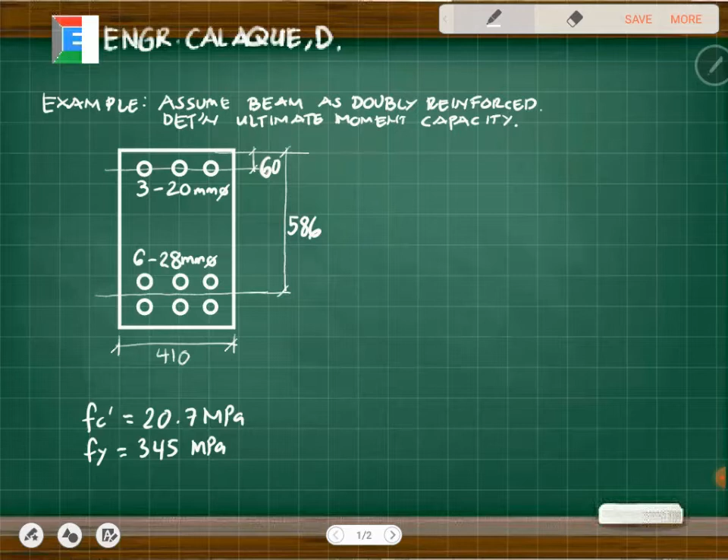Okay guys, let's continue on doubly reinforced beams. This time we'll investigate and determine the ultimate moment capacity, assuming that the beam in the figure is doubly reinforced. So the problem tells us to assume that the beam is doubly reinforced.

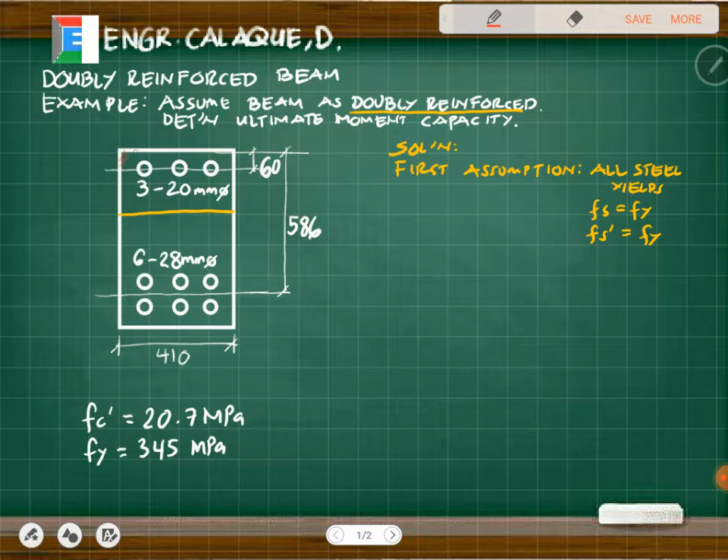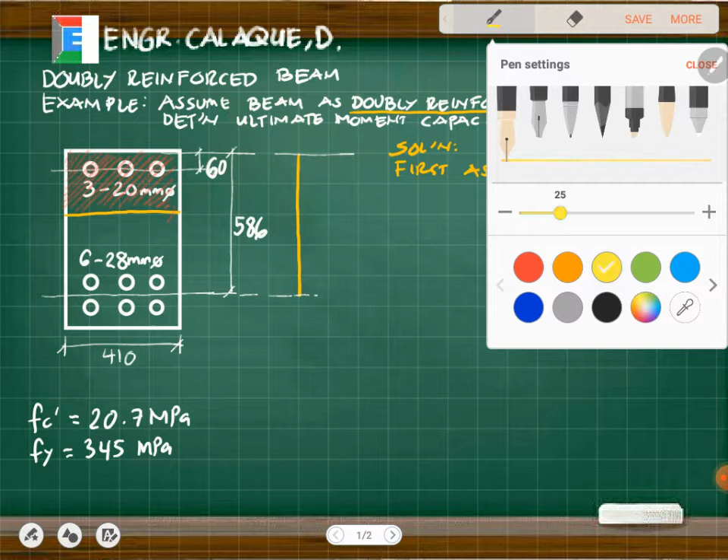Let me draw the forces. Considering the compression side, we have two forces here: the compressive force due to compression steel, CS, and I assume this is the center of gravity of the compression block, so let me project that - this is CC.

And then we have the tensile force for the tension bars. So by summation of forces along the x-axis equals zero, the tensile force is just equal to CC plus CS. And we know the tensile force here is As total times Fs. Then our CC, that's at the compression block.

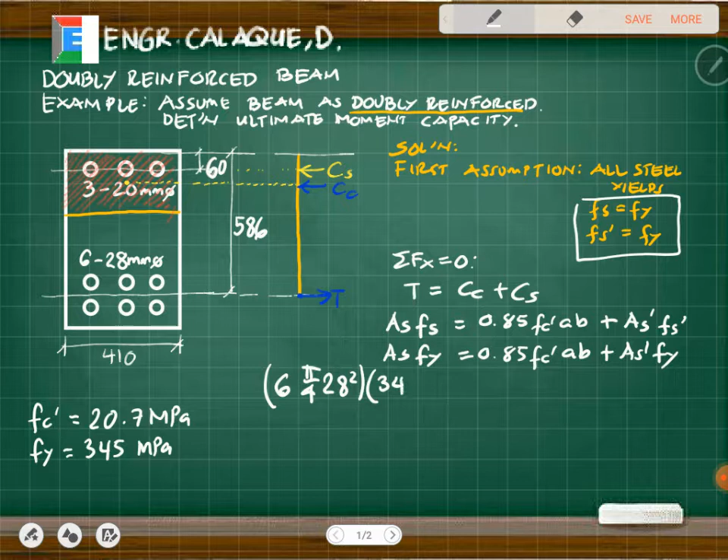So here we have 6 bars at pi over 4 times 28 squared - that's our As. Then our Fy is 345. And we have 0.85 times fc' which is 20.7 - we want to find A, the value of A. Our B is 410, plus the As prime, which is 3 bars at pi over 4 times 20 squared, times Fy which is 345.

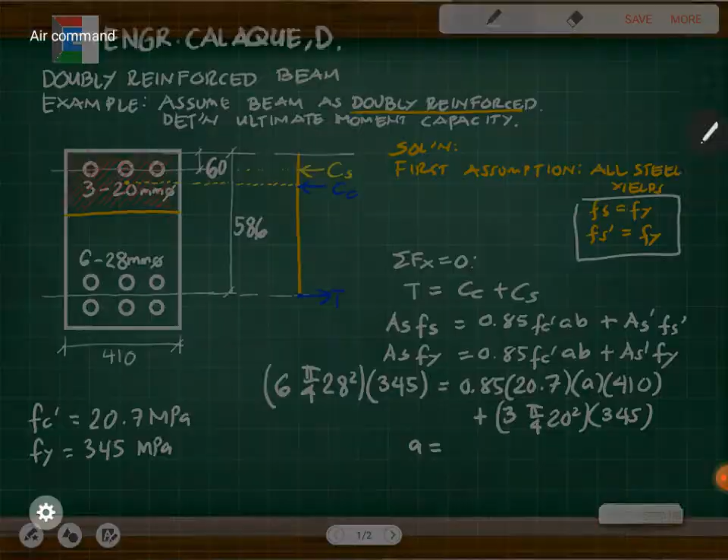345. So therefore, masolve natin yung value ng A. And that is just equal to... meron tayong 6 na shift, pi over 4 times 28 squared.

Times natin ng Fy na 345. Okay? And then alpha equal ng 0.85, diba? Yung Fc prime natin is 20.7. And then yung tinatanong yan yung A.

Okay, and then I have 410 na beam width, no? Yung ito, ito yan no? Then plus tayo nung area ng compression bar, which is 3 tag shift, pi over 4 na 20 squared. Yan yung diameter ng compression bar.

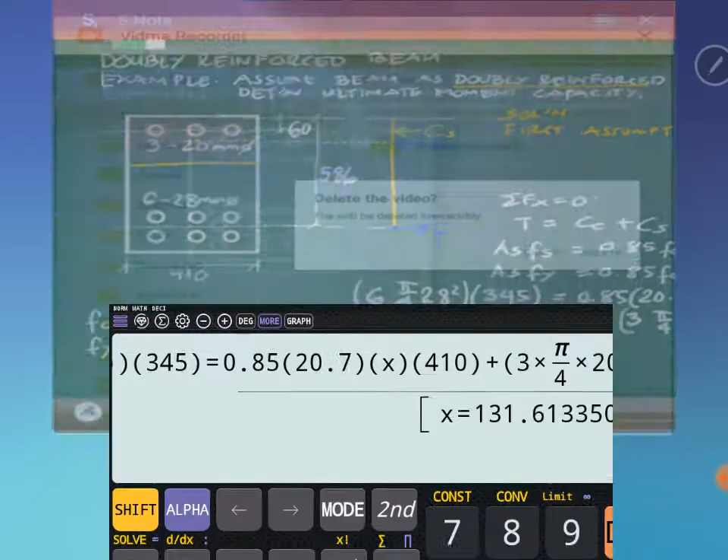Okay, and then we times yung Fy na 345. Okay, times 345. So shift solve. So yung A natin is just 131.6. Okay, so we have A that is 131.6.

So therefore, masolve na natin yung value ng C. We have a = βc. Yeah? Yung beta natin, since this is less than 28 megapascal for 2010 or 2015, so yung beta natin is just equal to 0.85. Okay ba? So yan yung ilagay natin dito. So we have 131.6, 0.85 C.

Therefore we have the value of C, and that is just equal to... 131.6 alpha equal nung 0.85 alpha x. So we have 154.8.

Okay? So ngayon, since nakuha na natin yung value, di ba? Ayusin ko lang muna, ha? Okay, so kailangan nating i-verify ngayon yung assumption natin. Verify assumption.

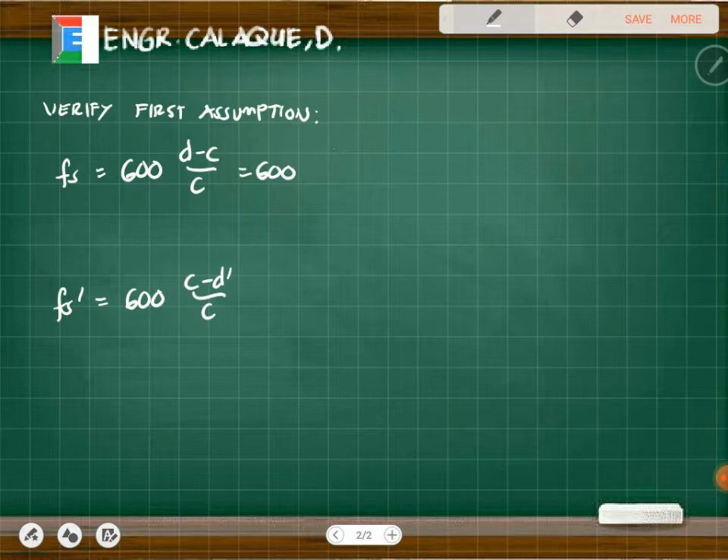So check natin yung Fs na 600 ng d minus c all over c. At then check natin yung Fs prime na 600 c minus d prime all over c. So substitute natin yung value. Therefore we have 600, yung effective depth natin is ito yan ha, 586. So we have 586 minus yung C natin na compute, 154.8, all over yung C natin na 154.8.

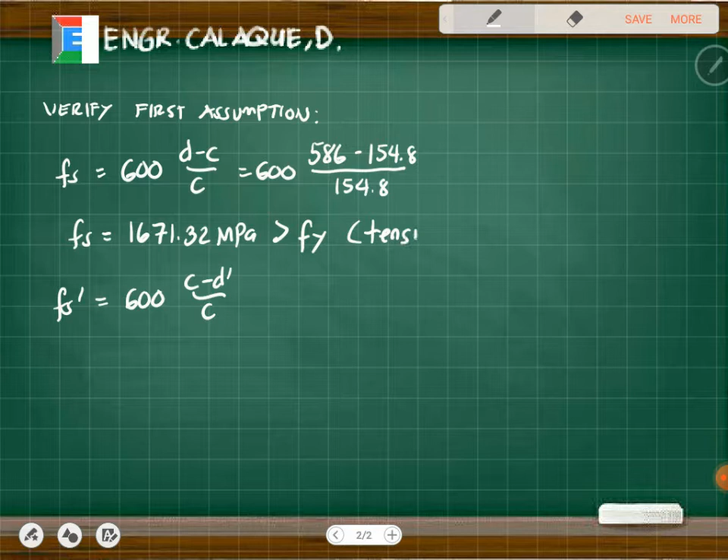So thus we have the value of the Fs, and that is just equal to computing ko muna. So I have 600 times 586 minus 1, minus 154.8 all over 154.8, and then equals, no? So we have 1671.32 megapascal. So since this is greater than Fy, so assumption is correct, tension still yields. So assumption is okay, no?

So okay na yan, no? So okay na yung computation natin. So next is yung Fs prime for compression bar. So we have 600, yung C natin is 154.8 minus yung D prime natin, which is ito yan. Ito yung D prime natin, yung 60 na yan. So minus 60.

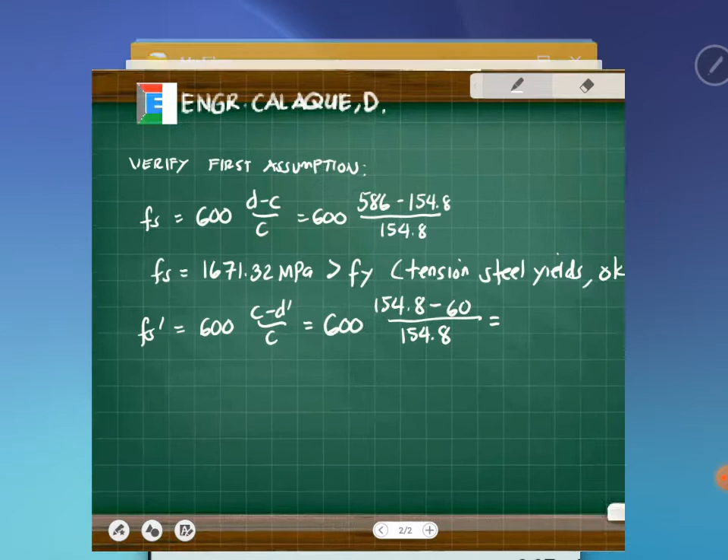All over 154.8. Okay, so therefore we have the value of, kapitin ko muna, I have 600 times 154.8 minus 60 all over 154.8. So therefore we have the value of 367.4 megapascal. Okay, yung Fy natin is 345 na.

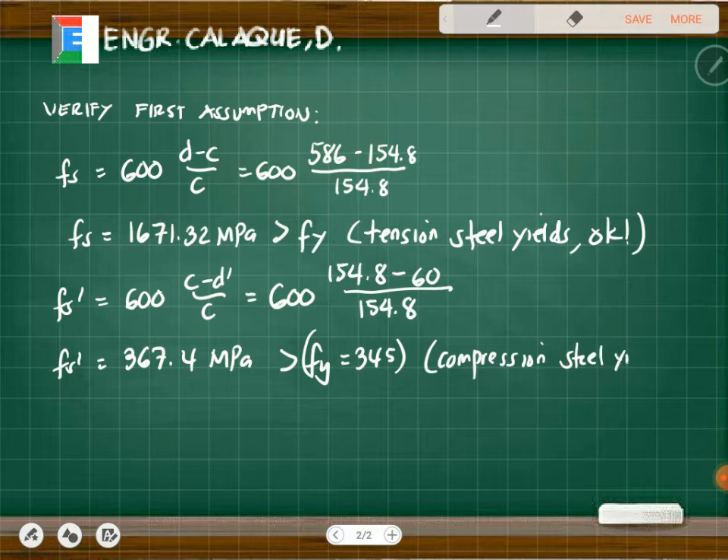So mas malaki pa rin to. So this is greater than Fy na 345. So therefore compression still yields. So yung assumption natin is okay. So ito na, ano? Ito na yung gagamitin natin.

Okay, so makompute na natin yung moment. Okay, so considering na lang ako dito, kunin ko na lang yung moment nito. So kailangan makuha ko lang yung mga moment arm nila, no? So yung moment arm nila ngayon is ito yan, di ba? Yung distance na to patungo dito, ilan yan?

Considering CC. So ito yung depth ng compression block natin is A, di ba? So ibig sabihin kalahati niyan, yung ito, o ito yan, project ko na lang, kalahati niya A divided by 2. Okay, so ito is, alam natin effective depth to dito. So this must be D minus A divided by 2.

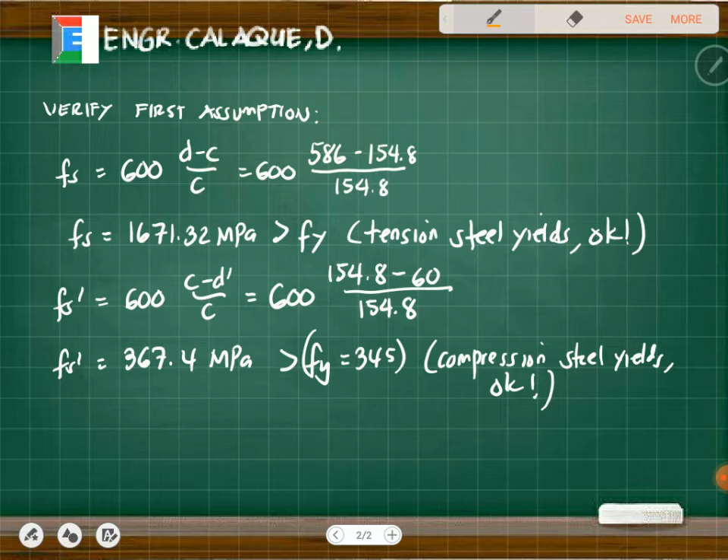For Cs naman, considering yung Cs, yung ito, di ba? So madali lang din, no? Ito alam natin D prime and effective depth, so this is D minus the D prime. So yung Mn pala, di ba? So yung Mn it's just equivalent nung CC natin times nung moment arm niya na D minus A divided by 2, tsaka yung ano natin, di ba, ito na yan.

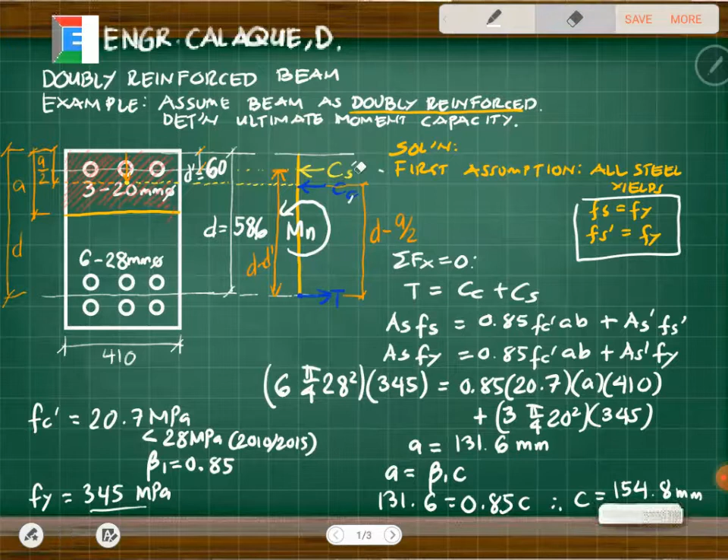Then yung moment arm ng CS. Okay? Yung moment arm ng CS natin is D minus the D prime.

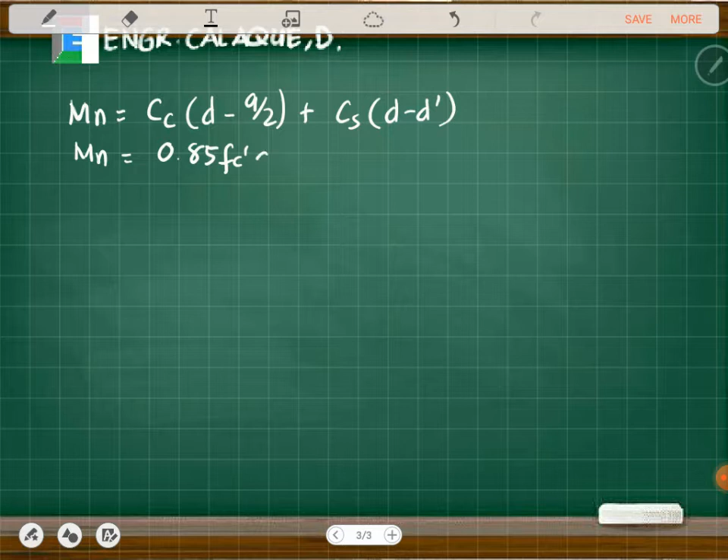Okay, so bali lagay ko na yung Mn. So this is equivalent to 0.85 f'c b d minus a over 2, plus yung Cs natin, which is As prime Fs prime, d minus d prime. Okay, so since nalaman natin na yung compression steel nag-yield, wala tayong problema, no?

So we will be using this Fs prime equals Fy. Okay, klaro yan ha? So masolve na natin yung value ng Mn. 0.85, ito na, pinakita ko na to sa mga previous video natin, pinakita ko to, no? So pwede balikan yan. So we have 20.7 for the Fc prime, and then yung A natin, na-compute na natin yan, that is 131.6, no?

So we will be using 131.6. Yung b natin is given, we have 410. Okay, so okay na ako dito, no? Next is yung effective depth natin, that is 586 minus yung c natin, di ba? Yung a pala, 131.6, divided by 2. So okay na ako dito sa Cc.

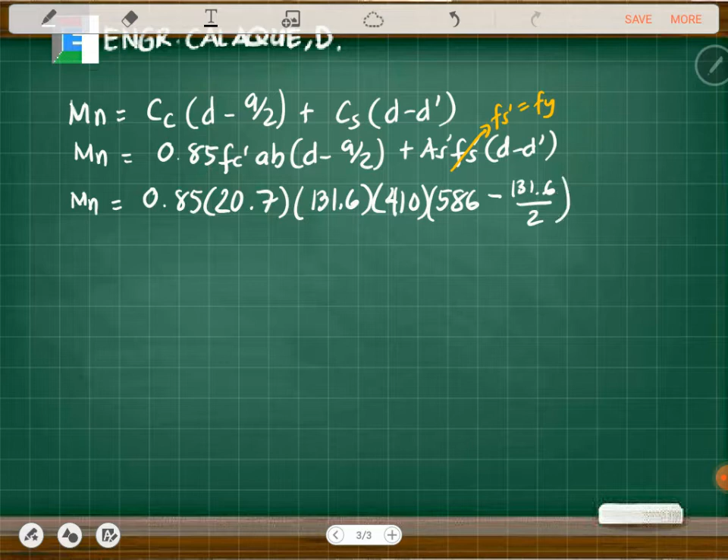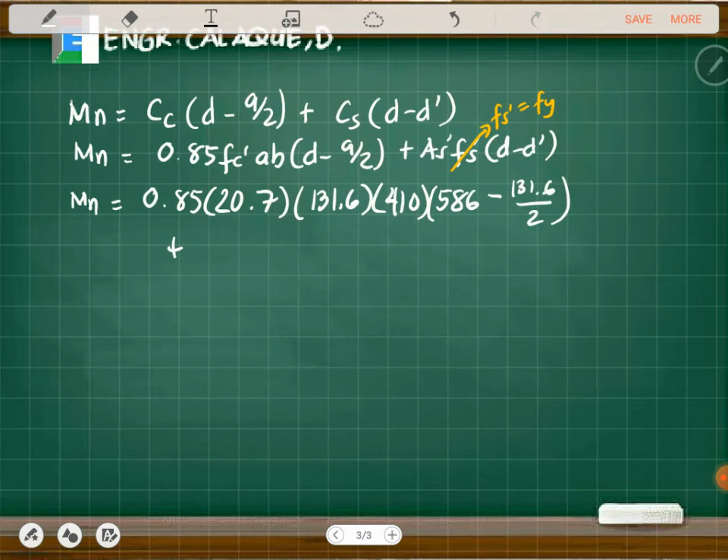Next is yung Cs. Yung As prime natin, meron tayong tatlong tag 20mm, no? So 3 times pi over 4, 20 squared. So yan yung As prime. Then yung Fs natin is equivalent ng Fy kasi yung compression steel nag-yield. So I'll be using 345. So 345 times yung effective depth natin na 586 minus effective depth sa compression bar, 586 tsaka 60. So minus 60. Okay, so lahat na yan naka Newton yan, Newton mm.

Divide na lang natin ng 10 to the power of 6 para makuha natin sagot diretso kilonewton meter. Okay, so compute natin yan. So we have 0.85 times 20.7 times 131.6 times 410 times 586 minus 131.6 divided by 2.

Okay, then yung sa steel area sa compression bar, tatlong tinag, pi over 4, 20 squared, plus ko na yan times yung Fy na, ito yan, inimpit ko lang yan, 345 times 586 minus 60. Okay, so I think okay na. So yan, answer ko na. Then answer divided by 10 to the power of 6. So the value is 664.89.

Okay, so we have 664.89 kilonewton meter. So yung phi Mn natin, which is yung ultimate moment capacity, so we have 0.9 ng 664.89. So therefore we have... okay ba? Okay na, bakit 0.9?

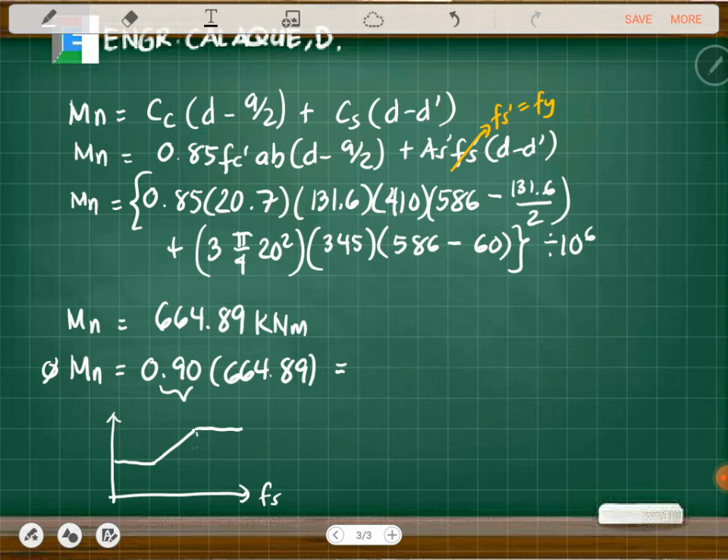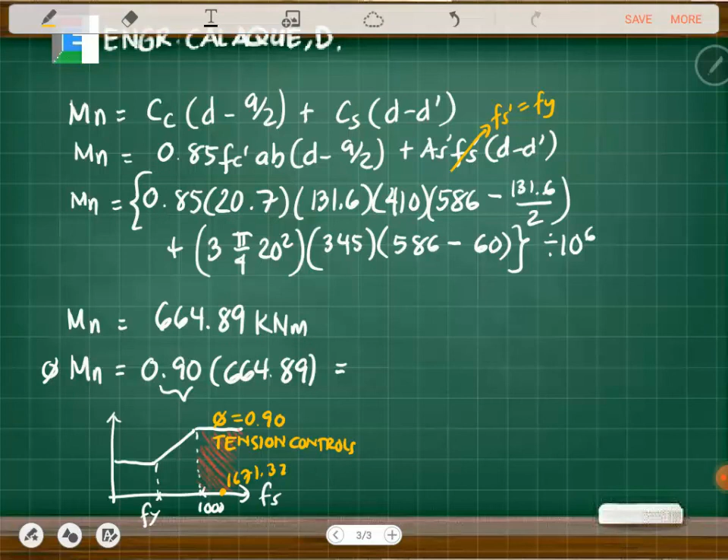So dito siya na belong, not transition, the tension controls. Okay, kaya yung phi na ginagamit natin dito is 0.9 kasi tension controls. Okay, so I hope klaro yan, bakit ito 0.9, no? So therefore we will have now 0.9 times 664.9. So therefore we have the value of 598.41. So this is 598.41 kilonewton meter. So ito na yung sagot.

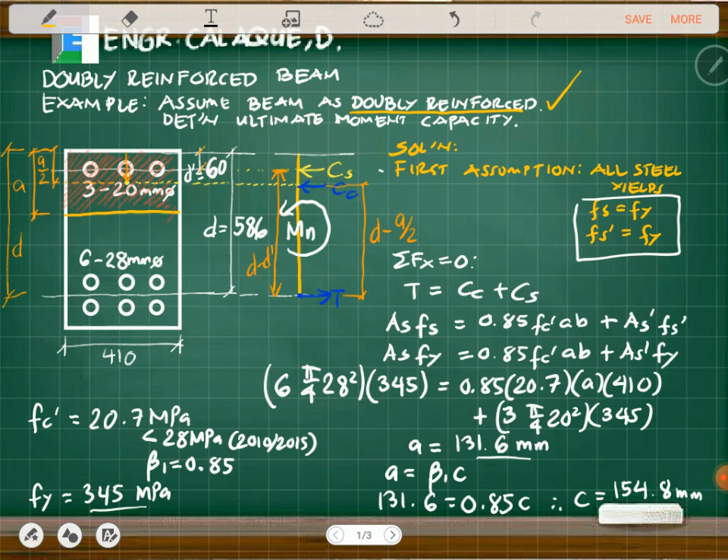Yan, no? So pag i-analyze natin, i-analyze natin ang beam as doubly reinforced, which is yan yung gusto ng examiner. So pag hindi niya sinabi na i-analyze mo as doubly reinforced, ikaw yung magdi-determine kung doubly or singly. So sa next na video na lang ko ipakita, ha. So ganun, thank you.